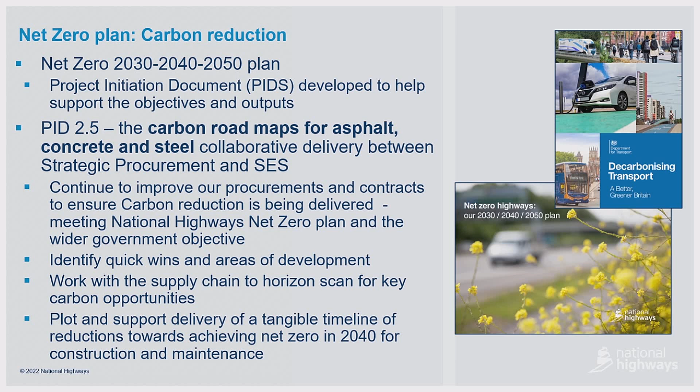This timeline, before I forget it, is really looking at how we could achieve net zero for pavement maintenance and construction. So focusing on net zero and focusing on pavement maintenance and construction. I'm not going to say everything that's on this slide, but I'll just highlight some key points that I think are most relevant.

Strategically, what we're looking at is really opportunities. What are these opportunities? We want to reduce and build less. What we're looking at here is trying to do better what we have, so ensuring that we're maximizing our asset and ensuring that through this maximization of our assets, we're actually reducing our carbon.

One of the examples, some of you are working on it and some of you are aware of it, is the Legacy Concrete Program. Here we introduced something called Life Extension Works, and the name says it all really. With our concrete pavement, most of you know, we're arriving to the end of life or beyond the design life of the pavements. What these life extension works are is we're trying to increase the life of the pavement for another 10, 20, even 30 years before we actually go on to doing any reconstruction.

Then what we have to consider, which is listed there, is what the whole life cost aspects are, any interdependencies with other technologies, because this is really becoming not something on the horizon, but it's really here and it's no longer a pipeline vision. And also asset resilience and climate change.

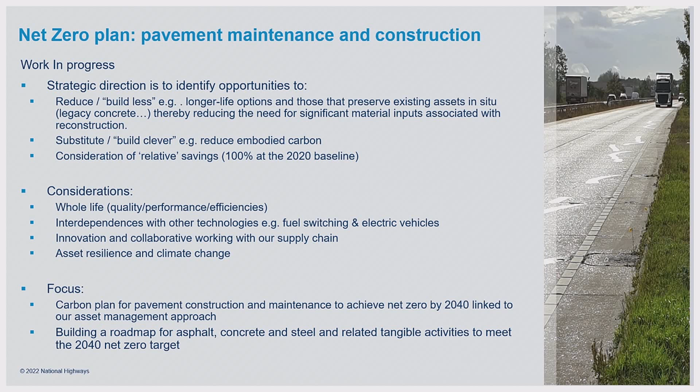The focus is on developing a carbon plan for pavement construction and maintenance to achieve net zero by 2040, linked to the asset management approach. What is key here is that everything we do is underpinned by asset management and an asset management approach. And you may be wondering, what is this asset management approach?

So by embedding or amalgamating both these drivers and challenges, we want to produce a standardized process for our asset management. We want to enable net zero. We want to arrive at digital roads, and we want to digitize and automate our processes, which is really linked to the changes we're doing to our MCHW.

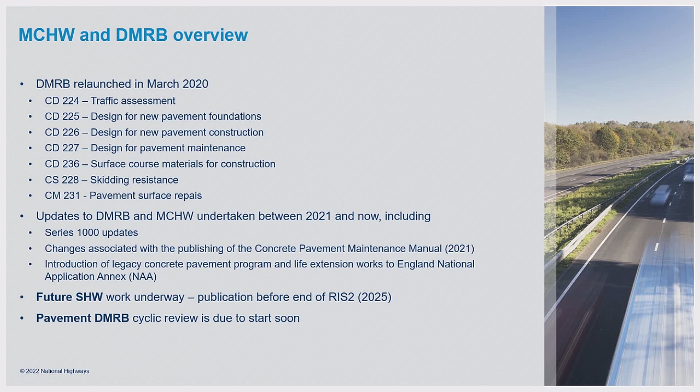So the structure of the future SHW. We're familiar with the current MCHW volume structure. It will be replaced. Volume 1 and Volume 2 will be fully updated. Volume 3, the highways construction details, will be removed, with the relevant drawings or contents moved to the relevant DMRB and MCHW. All the old documents will still be made available through the Standards for Highways website, although the contents will not be maintained.

In the future SHW, we have the Specification for Highway Works, and the Instructions for Specifiers documents. The bill of quantities will be attached to the relevant schedule. In the Instructions for Specifiers document, it will be published with both the default set of constructor requirements and also the specifier's instruction on the work-specific requirements related to the SHW requirements.

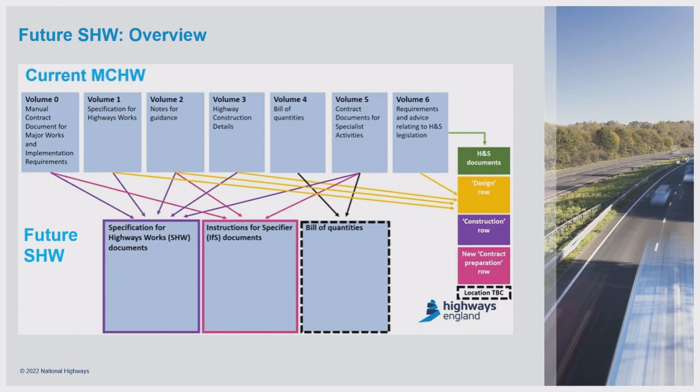This may look familiar - it's the asset lifecycle matrix, which we adopted for the DMRB relaunch, where we have the CD series documents for the pavement design. For the future SHW, after considering various options, we decided the best approach was to follow the asset lifecycle matrix applied for the DMRB. This should hopefully help improve usability, and the new SHW document will come under CC, construction pavement construction, CC2, helping align the relevant documents with the design standards.

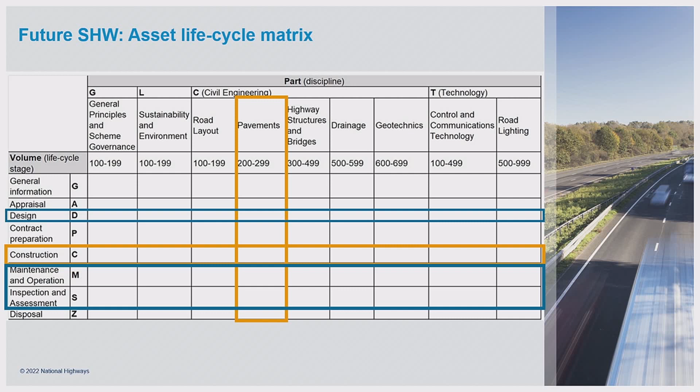We mentioned it's going to be CC, starting with CC2. On the right-hand side is a list of the future pavement SHW documents. Taking a few examples: CC201 will be the pavement foundation construction. The specification contained in that document will primarily replace the current 800 series. It also has the capping from the current 600, and a few other clauses from 700, such as regularity.

The current 1000 series will be split into two documents: CC203, rigid pavement construction, which is new build and widening, and CC206, maintenance pavement, concrete slabs and bases, which is the maintenance section. The title may look a bit misaligned - we'll come on to that. It seems a bit long, but I'll explain that later.

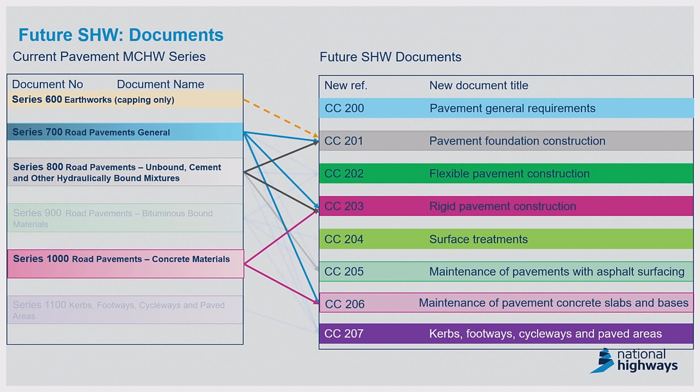The idea is the relevant information for foundation, for example, will be in one single design document, CD225, and then the construction information contained in one document, CC201. So hopefully when the specification and schedule are prepared, there will be less cross-referencing, and the same applies to the other documents as well.

We're hoping to bring clear links and pathways between the design documents and the specification documents. On the left, you have the current DMRB design documents; on the right, the future SHW documents. Taking pavement foundation construction as an example, we have CD225 as the design and CC201 as the specification and schedule. With this update, we're hoping to move towards full compatibility between DMRB and MCHW, digitally enabling machine readability as part of the journey towards end-to-end digital.

So what does end-to-end digital mean? One aspect is that we have a pavement design coming out based on the DMRB documents, and there will be relevant requirements on the specification linking to the future SHW document, along with work-specific input from the IfS documents. The specification then pops up at the end of the process. We're not quite there with end-to-end digital yet, but this update work will facilitate the process to help us move in that direction.

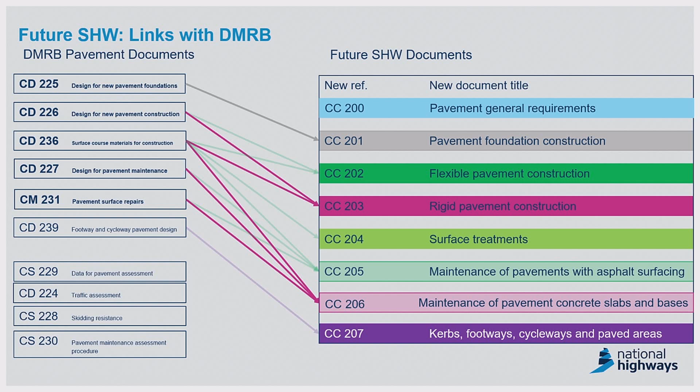One of the drafting rules is that SHW requirements need to be split out, so there will be one requirement in every single clause. There are also other drafting rules, such as being unique and specific. For example, with concrete slabs, it may be mistaken for structural slab, hence we have 'pavement concrete slab' - that's why some titles may look extra long.

In the future SHW, there will be elements for the constructor requirements, SHW requirements, and also placeholders for specifiers to put in work-specific requirements. There will also be elements of the nationally determined requirements sections.

In the future SHW requirements, we can only put in anything related to products, materials, or construction activities related to products or materials. For example, construction activities to make sure products and materials are installed properly - in other words, installation workmanship - or construction activity related to verification, including testing or inspection, to make sure the work is acceptable, and documentation to make sure other requirements are met.

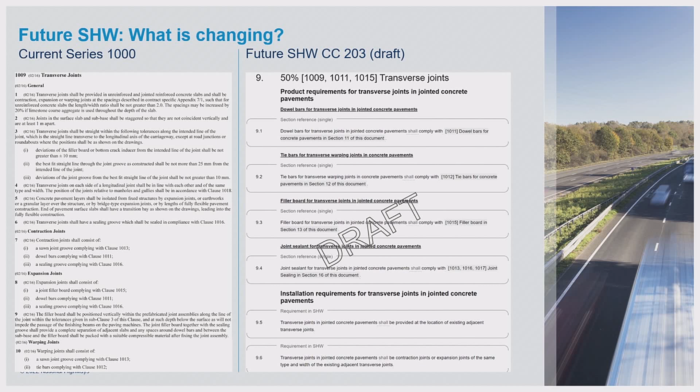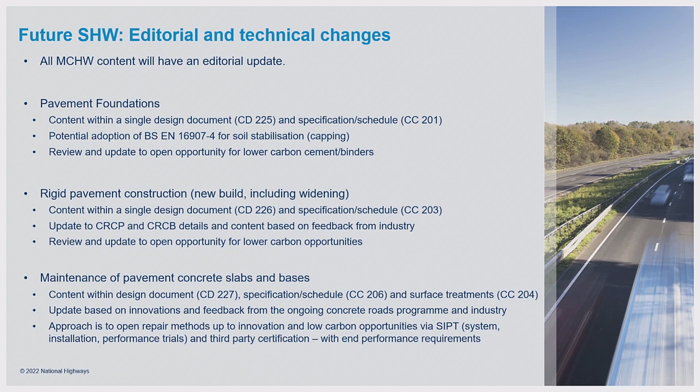So last but not least, what does success look like? I hope by working collaboratively with industry and proactively planning work linked to our imperatives - safety, customer, and delivery - and better serving the needs of our customers through ongoing improvement and learning, we'll get there eventually. That's all from me - thank you for listening. Any questions?